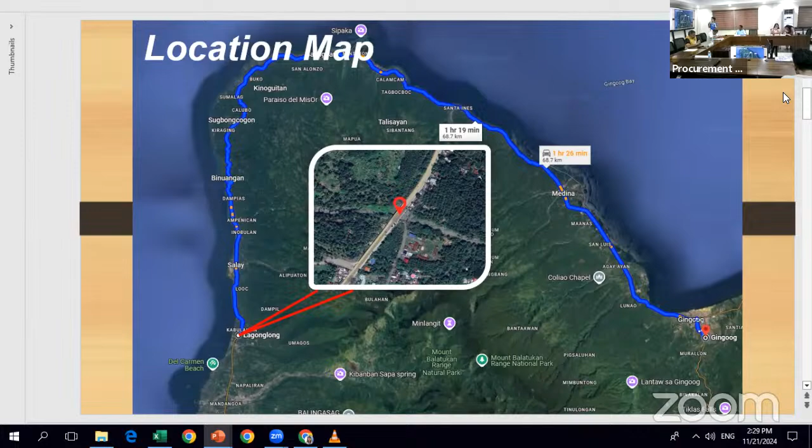This is the location map of our project, which is located at Barangay Kibungsod, Magsaysay, Misamis Oriental. The bridge length is 94 meters. Appropriation of 20 million, approved budget cost of 19,300,000, and a project duration of 120 calendar days.

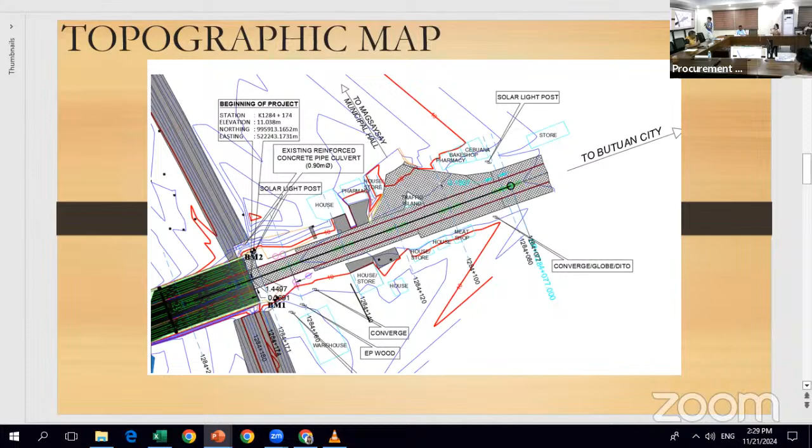This is the topographic map of our project. As we can see, there are sections of road not yet complete, which is part of the scope of our project. Aside from that, there is an incorrect grade, which is the connection sa approach to our bridge deck, which dips slightly, so we will correct it so it's not bumpy when passed.

These are the scopes of our project. First, we have existing PCCP reinforced, which is for reblocking, and then proposed widening PCCP unreinforced. We have existing shoulder to be removed on both sides. We have proposed stone masonry, proposed wheel guard, existing structure for removal (the island sa Kibungsod), and proposed widening of our roads which will connect to our existing widening.

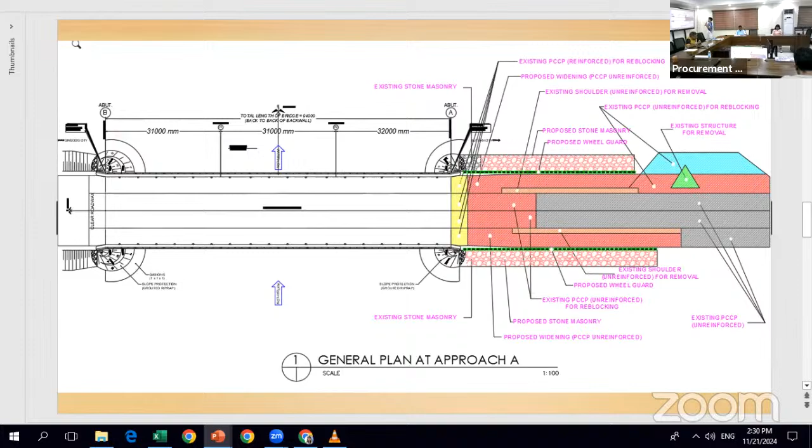Aside from that, we also have permanent sheet piles driven at the approach, which is approach A, so that it won't sag at the grade we will correct.

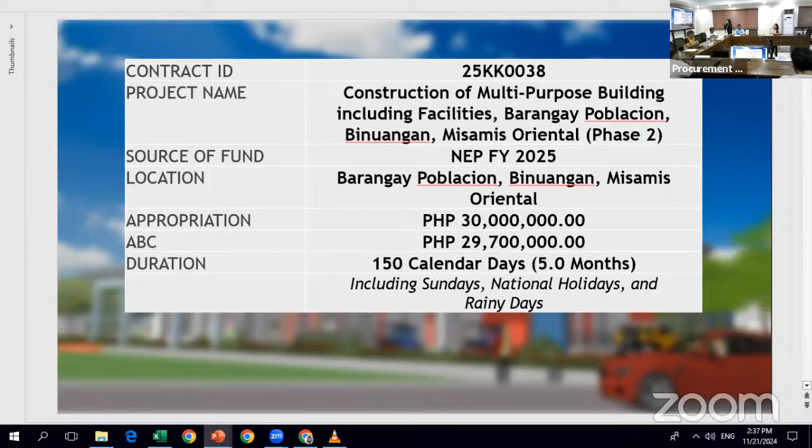Project 25KK0038, or the construction of multi-purpose building, including facilities, Barangay Poblacion, Binuangan, Misamis Oriental, Phase 2. Our appropriation is 30 million and the ABC is 29,700,000. The duration of the project is 150 calendar days, or 5 months.

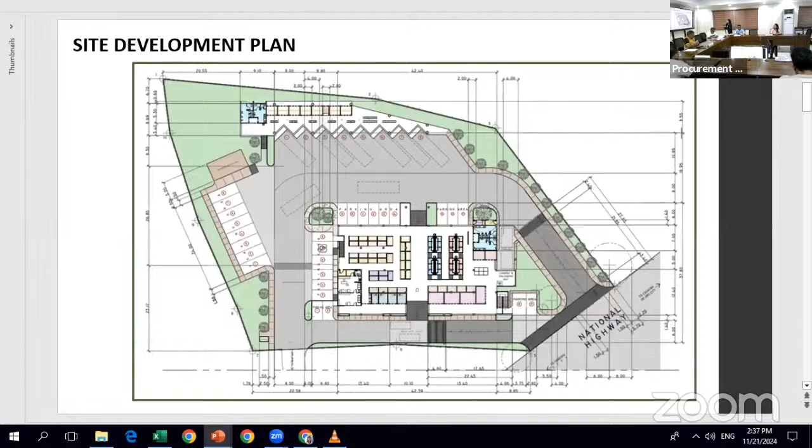So this is our project site, the site development plan, and the perspective of the project.

So our project scope: construction of multi-purpose building, including facilities in Barangay Poblacion, Binuangan, Misamis Oriental, Phase 2, a 42.4 by 24.4 public market, where the scope consists of the following.

We have removal and relocation of 2 electrical posts, completion of the existing columns and construction of additional columns for the facade and rear part of the building, complete roof beams and roof trusses, complete roofing works.

This includes installation of 25 mm thick polyurethane roof panel and other roofing accessories such as gutter, flashings, and downspout, fiber cement ceiling for the office area, bathroom area, and a rentable space, tiling works.

This includes complete non-skid floor tile for the whole building, wall tiles for the bathroom area and granite countertop, complete concrete gutter, complete masonry works for marketplace, market office, bathroom area, rentable spaces, and other market stalls, complete doors.

And windows, complete 2-unit septic tank, complete wastewater treatment, complete plumbing fixtures and sanitary works, complete catch basin, complete water pumping system, complete fire alarm system, structural support for electrical works, and complete electrical works.

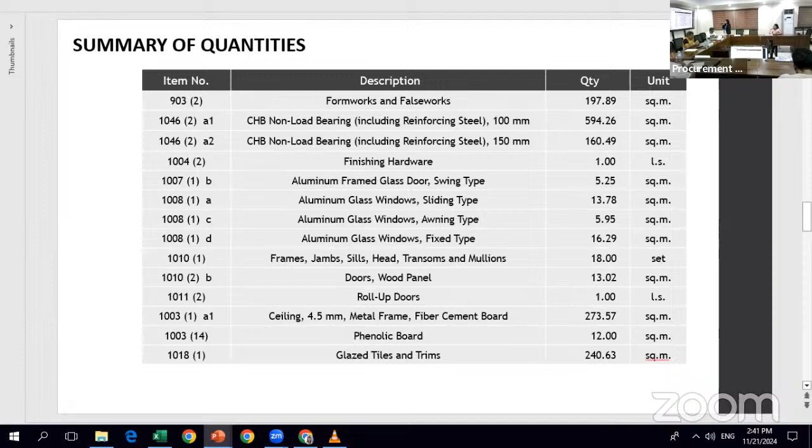Wood panel, roll-up doors, ceiling, 4.5 mm thick, metal frame, fiber cement board, phenolic board, glazed tiles and trims, unglazed tiles, granite tiles, cement plaster finish, railing, painting works for masonry/concrete, wood and steel, fascia board, metal.

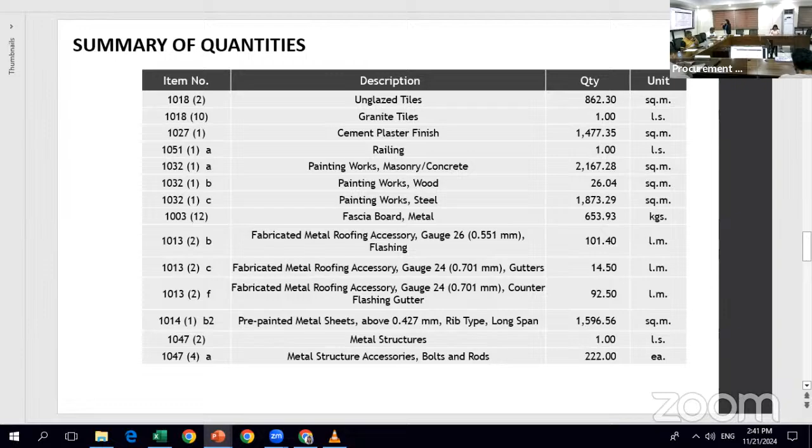Fabricated metal roofing accessory, gauge 26, flashing, fabricated metal roofing accessory, gauge 24, gutters and counter flashing gutter, pre-painted metal sheets above 0.427 mm thick, rib type long span, metal structure accessories, bolts and rods, turnbuckles, sag-rods, cross bracing and steel plates.

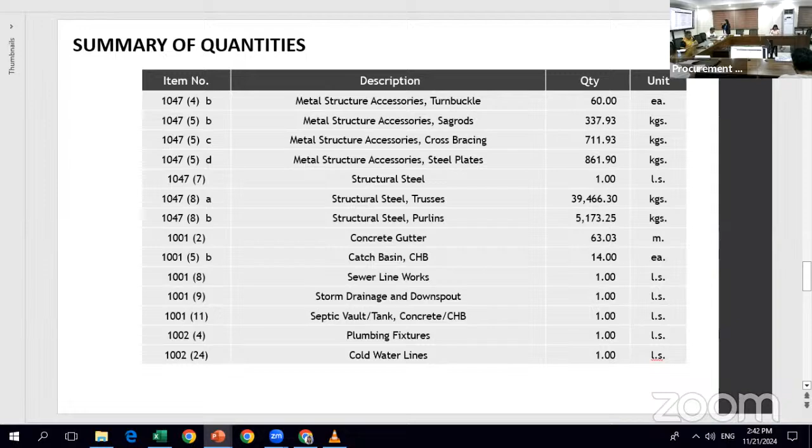Structural steel for trusses and purlins, concrete gutter, catch basin, CHB, sewer line works, storm drainage and downspout, septic vault/tank, concrete/CHB, plumbing fixtures, cold water lines.

Conduits, boxes and fittings, wires and wiring devices, panel board with main and branch breakers, lighting fixtures, water pumping system, and fire alarm system.

So for the minimum equipment requirement, we have one backhoe, one dump truck, one plate compactor, one bagger mixer, one welding machine, one truck mounted crane, one bar cutter and one bar bender, one cutting outfit, and two concrete vibrators. So that would be all.

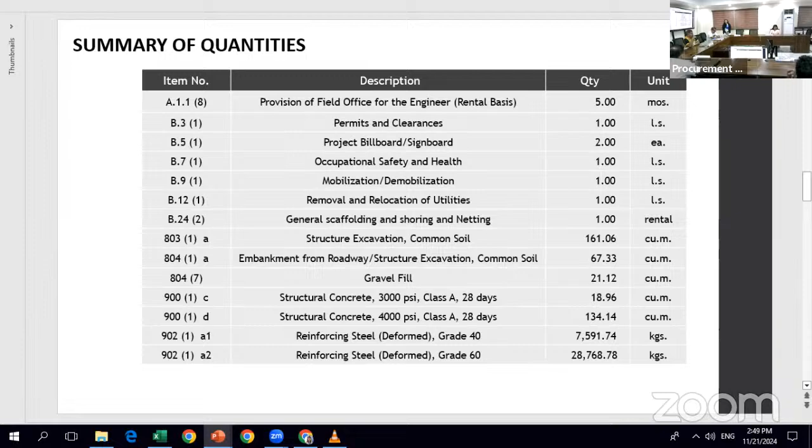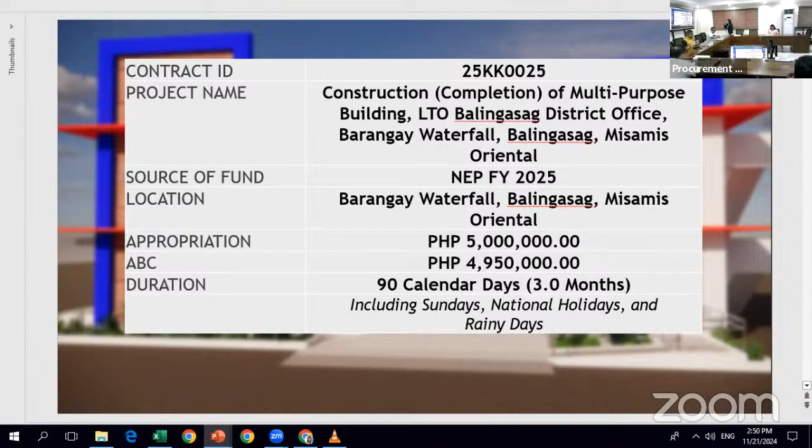For the next project, contract ID 25KK0025, construction completion of multi-purpose building, LTO Balingasag District Office, Barangay Waterfall, Balingasag, Misamis Oriental. The appropriation is 5 million, the ABC is 4,950,000. The duration of the project is 90 calendar days.

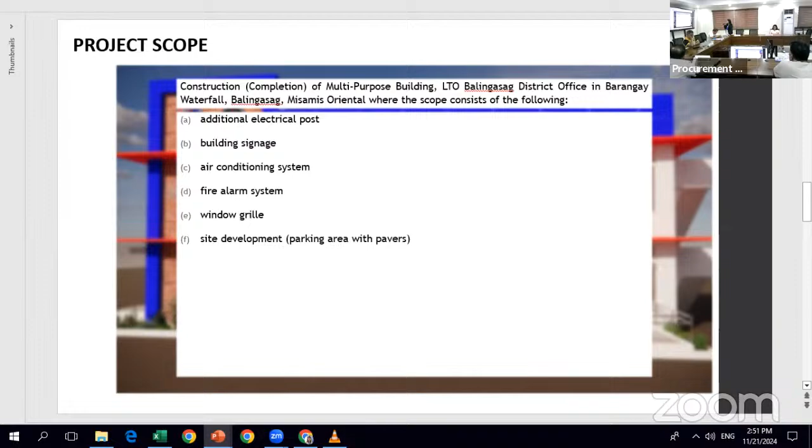We have the additional electrical post, building signage, air conditioning system, fire alarm system, window grille, and site development parking area with pavers. So the summary of quantities: provision of field office for the engineer, rental basis, permits and clearances.

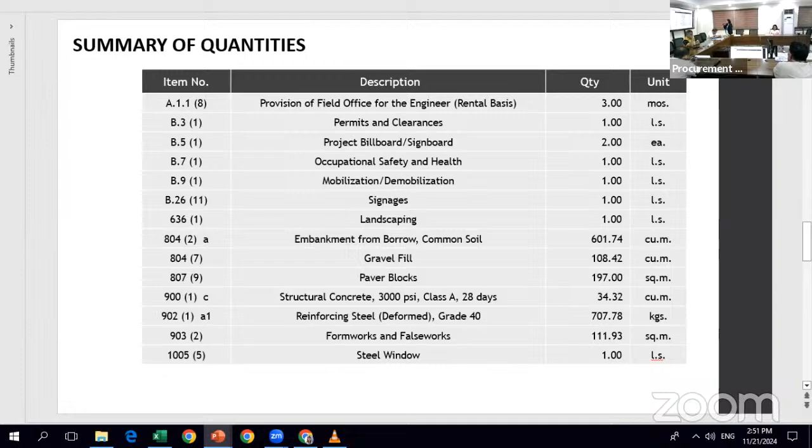Project billboard, signboard, occupational safety and health, mobilization, demobilization, signages, landscaping, embankment from borrow, common soil, gravel fill, paver blocks, structural concrete, 3,000 PSI, class A 28 days, reinforcing steel deformed, grade 40, formworks and false works, steel window.

So for the minimum equipment requirement, we have one backhoe, one plate compactor, one bagger mixer, welding machine, bar cutter, and bar bender. So that would be all.

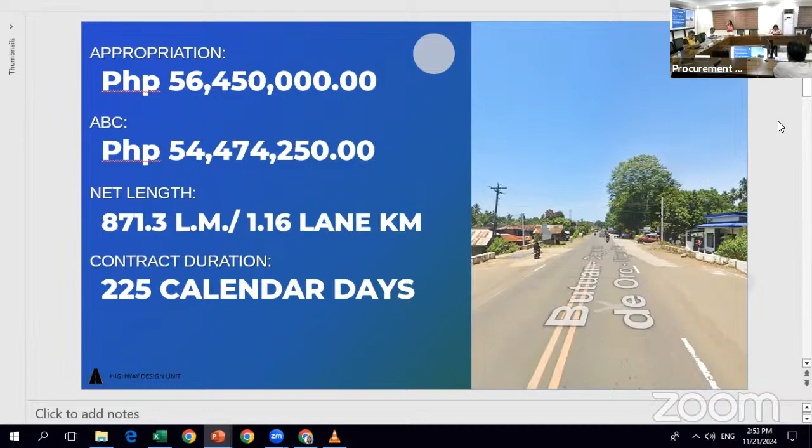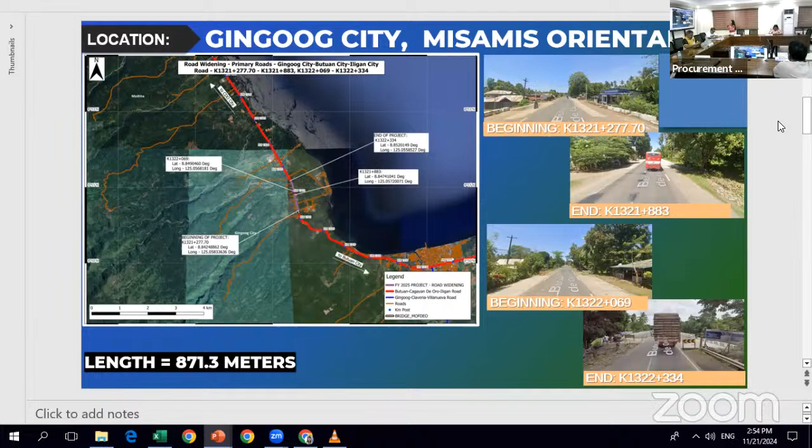Our project location is at Barangay Lunao, Gingoog City, Misamis Oriental. For segment 1, our beginning is at 1321 plus 277.7, right after Catuan Bridge, and end station is 1321 plus 883. For segment 2, beginning is at 1322 plus 069, and end station is at 1322 plus 334, right before Lunao Bridge.

Next, our scope of work: widening of road with 3.35 meters width with 0.3 meters thickness of PCCP. We also have paved shoulder, 2 meters width with 0.25 meters thickness of PCCP on both sides. We have concreting of junction road, 5 meters width with 0.25 meters thickness. We also have construction of retaining wall with wheel guard with paint, and construction of line canal and installation/extension of culverts.

We have 910 mm and 1070 mm diameter RCPC. We have one barrel 2.4 by 2.20 meters RCBC, and two barrel 1.9 by 4 meters RCBC. Also, white reflectorized thermoplastic painted markings and removal of existing structures and obstruction, including removal of trees, existing line canal, slope protection, guardrails, existing PCCP, and existing slabs.

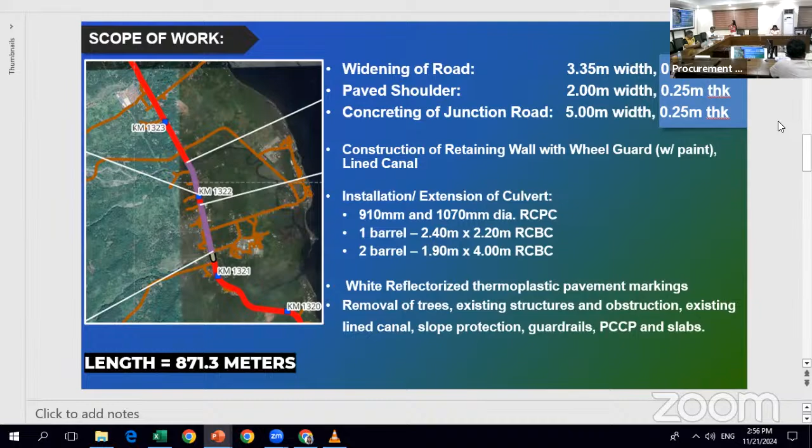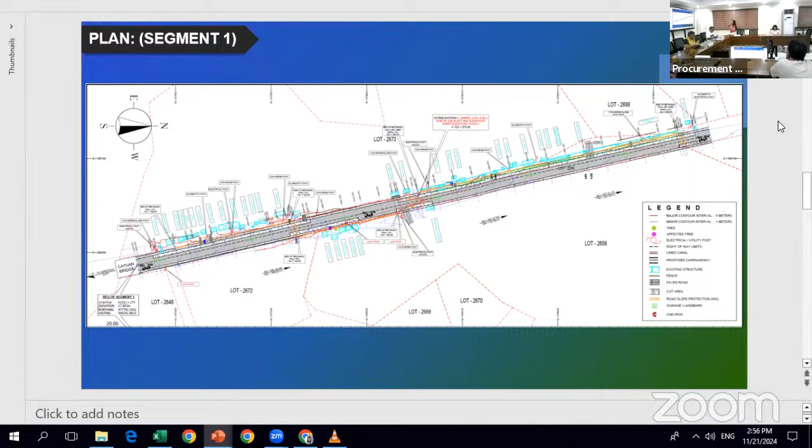So this is the plan. We have our segment 1, the start of the project right after Catuan Bridge. For this segment, there are 3 lanes, so we will connect the gap for our widening and paved shoulders on both sides, and also concrete the junctions. For segment 2, right after the 4 lanes and before Lunao Bridge.

So these are the items included in the project. We have provision of field office for the engineer, project billboard and signboard, occupational safety and health program, traffic management, mobilization and demobilization, removal and relocation of utilities for our electrical posts, individual removal of trees, and removal of structures and obstruction.

Removal of actual structures and obstruction for our affected houses, stores, and waiting sheds. We have removal of existing guardrails, guardrail posts, and removal of actual structure and obstruction of 0.15 meters thick PCCP and 0.2 meters thick PCCP.

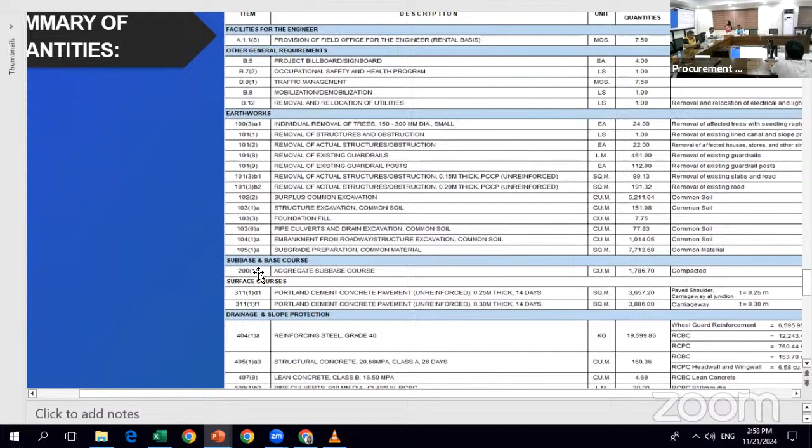We have aggregate sub-base course, Portland cement concrete pavement unreinforced, 0.25 meters thick, 14 days, for our paved shoulder and construction of the junction roads, and Portland cement concrete pavement unreinforced, 0.3 meters thick, 14 days, for our widening.

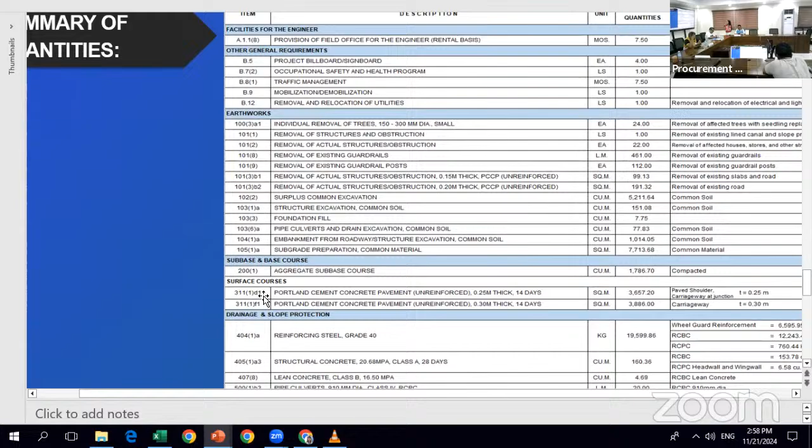And we have reinforcing steel grade 40, structural concrete 20.68 MPa class A 28 days, lean concrete, pipe culvert 910 mm diameter class 4 RCPC, and 1070 mm diameter class 4 RCPC.

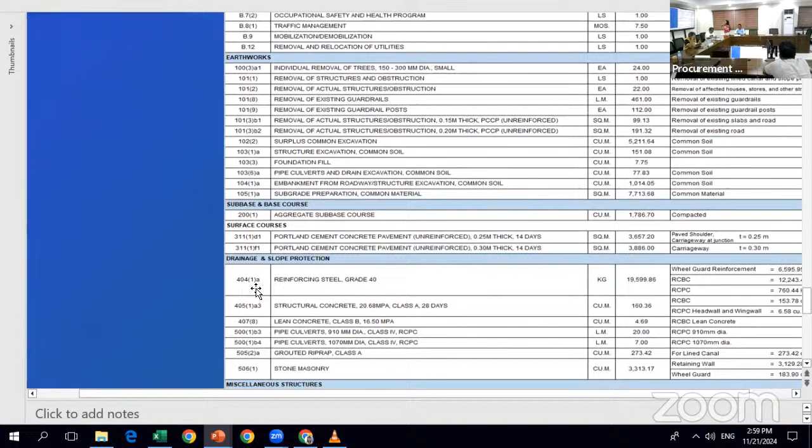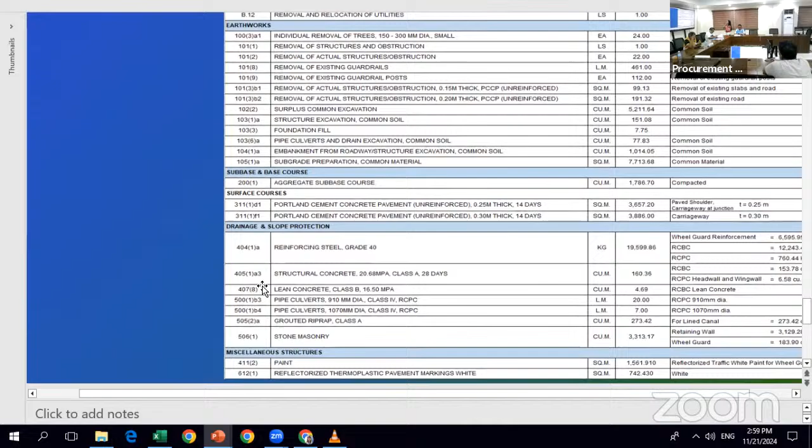We have grouted riprap, stone masonry, paint, and lastly, reflectorized thermoplastic pavement markings white. That would be all, sirs. Thank you.

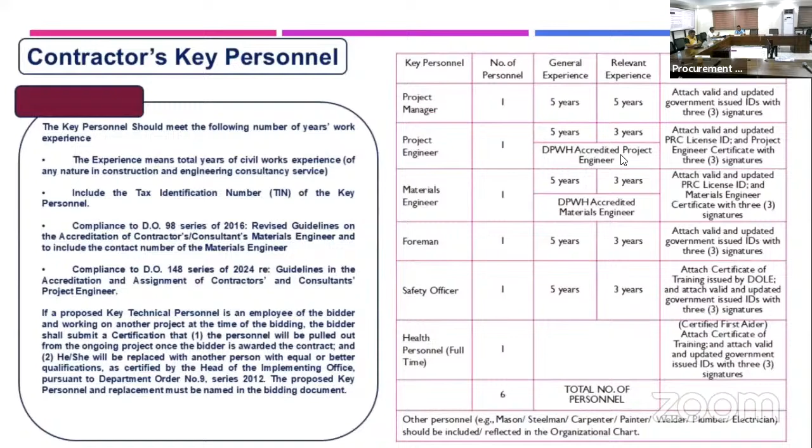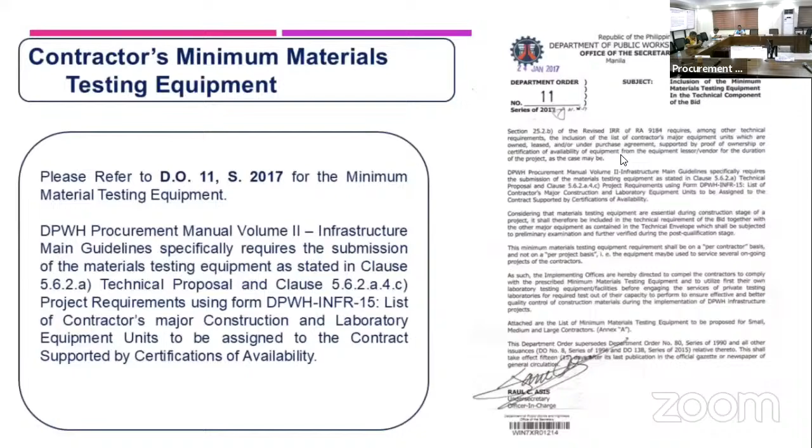List of contractors' major construction and laboratory equipment units to be assigned to the contract, supported by certifications of availability. B. Original duly stamped omnibus sworn statement (OSS), and if applicable, original notarized secretary's certificate in case of a corporation, partnership, or cooperative, or original special power of attorney of all members of the joint venture, giving full power and authority to the officer to sign the OSS and the acts to represent the bidder.

Financial documents: H. The respective bidder's computation of Net Financial Contracting Capacity (NFCC), Class B. I. If applicable, duly signed joint venture agreement (JVA) in accordance with RA number 4566 and its IRR, in case the joint venture is already in existence, or duly notarized statements from all the potential joint venture partners stating that they will enter into and abide by the provisions of the JVA in the instance that the bid is successful.

For the financial component envelope: J. Original of duly signed and accomplished financial bid form, and other documentary requirements under RA number 9184. K. Original of duly signed bid prices in the bill of quantities. L. Duly accomplished detailed estimates form, including a summary sheet indicating the unit prices of construction materials, labor rates, and equipment rentals used in coming up with the bid. And M. Cash flow by quarter.

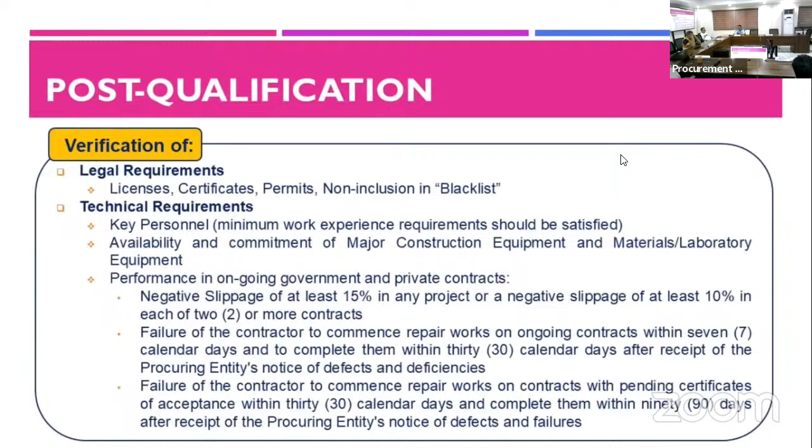Negative slippage of at least 15% in any project, or a negative slippage of at least 10% in each of 2 or more contracts. Failure of the contractor to commence repair works on ongoing contracts within 7 calendar days and to complete them within 30 calendar days after receipt of the procuring entity's notice of defects and deficiency. Failure of the contractor to commence repair works on contracts with pending certificates of acceptance within 30 calendar days and complete them within 90 days after receipt of the procuring entity's notice of defects and failures.

Contract award: the contract shall be awarded to the bidder whose bid has been determined to be the lowest calculated and responsive bid, or LCRB, as a result of the detailed evaluation and post-qualification conducted. The successful bidder shall be notified through the issuance of notice of award within the bid validity period and must be confirmed by the successful bidder in writing within 10 days upon receipt thereof, in accordance with section 37.2.2 of the 2016 revised IRR of RA 9184.

Common reasons for rejection is ineligibility and post disqualification of bid. 1. Failure to submit original copy of the insurance form certified by the Insurance Commission indicating the name of contract, the procuring entity, and the name of contract.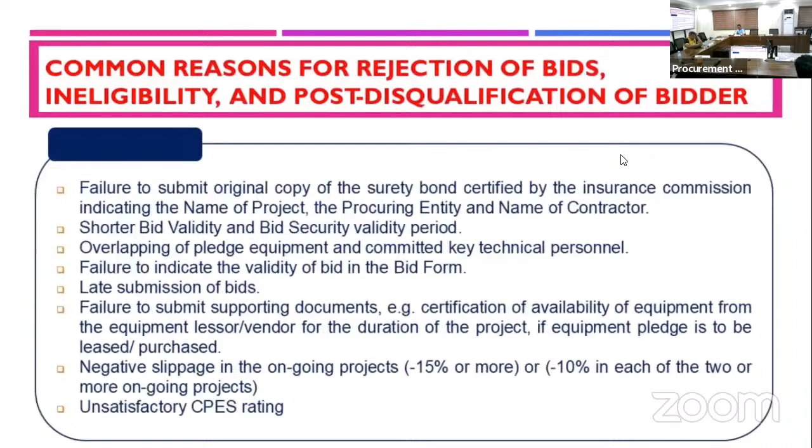6. Failure to submit supporting documents, such as the certification of availability of equipment from the equipment lessor or vendor for the duration of the project, if the equipment pledged is to be leased or purchased. 7. Negative slippage in the ongoing contracts, negative 15% or more, or negative 10% in each of 2 or more ongoing contracts. 8. Unsatisfactory performance rating.

9. Incomplete or unclear documents. 10. Authority of the signatory to sign on behalf of the bidder.

For single proprietor, the signatory should be the owner or proprietor only. For corporation or cooperative, board secretary certificate and board resolution. For joint venture, joint venture agreement and resolution. For partnership, as indicated in the articles of partnership. That is all. Thank you.

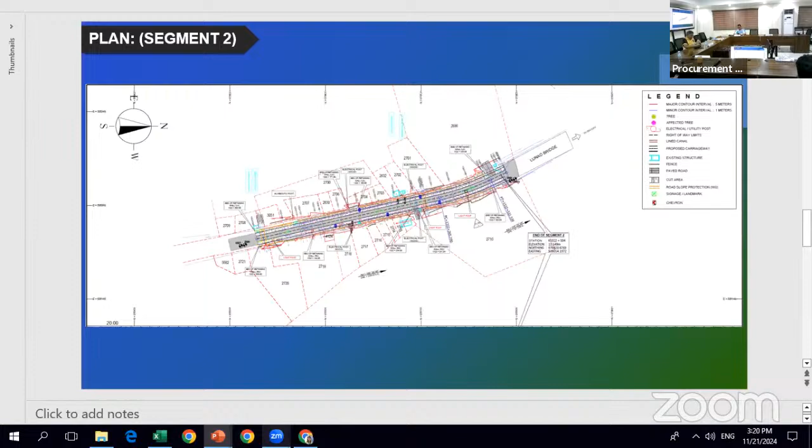First, the open services as per Department Order number 17, series of 2022. Section 69.1. In addition to the provisions of rules 21 and 22 of this IRR, the HoPE, subject to the authority delegated to the BAC, if any, shall impose on bidders or prospective bidders the administrative penalty of suspension for 1 year for the first offense and suspension of 2 years for the second offense from participating in the competitive bidding process, as well as disqualification from further participating in the competitive bidding being undertaken for the procuring entity concerned, where applicable, for the following violations.

All other acts that tend to defeat the purpose of competitive bidding, such as habitually withdrawing from bidding, submitting late bids, or patently insufficient bid for at least 3 times within the year, except for valid reasons.

Light violation: a bidder that had purchased bidding documents but subsequently withdrawn from the bidding, or submitted a letter of non-participation, or did not submit a bid with a valid cause as determined by the Bids and Awards Committee concerned. Also, a bidder submitting insufficient or defective documents such as insufficient bid securities and other deficiencies.

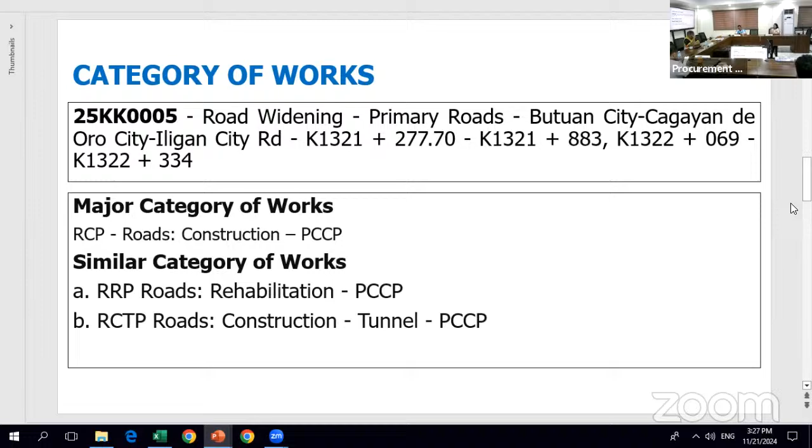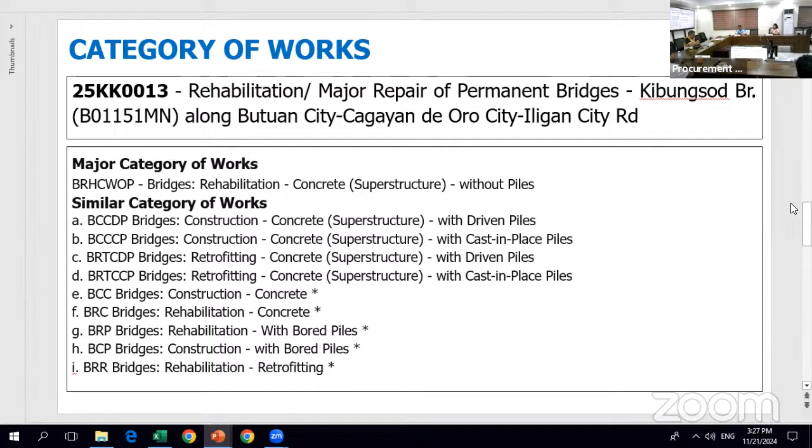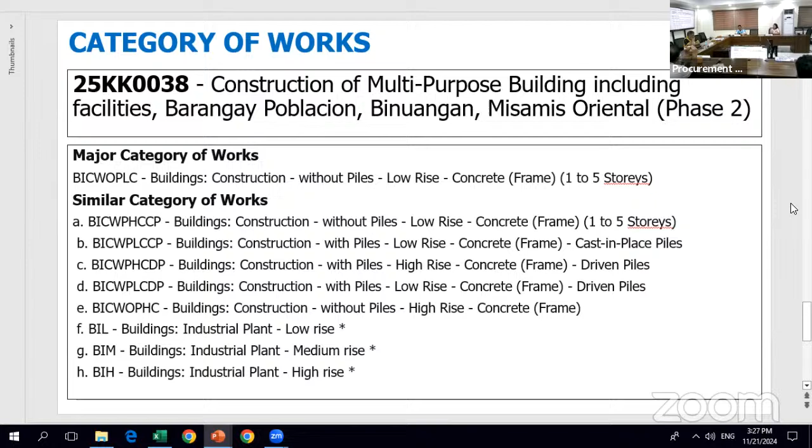As shown, this is an example of the technical and financial documents to be submitted with respect to this. So the bid and supporting documents should be held properly. That's it, Mr. Chair. Thank you.

Thank you, Engineer April, for the reading of this procurement activity schedule and category of work. Do we have questions from the online viewers? None.